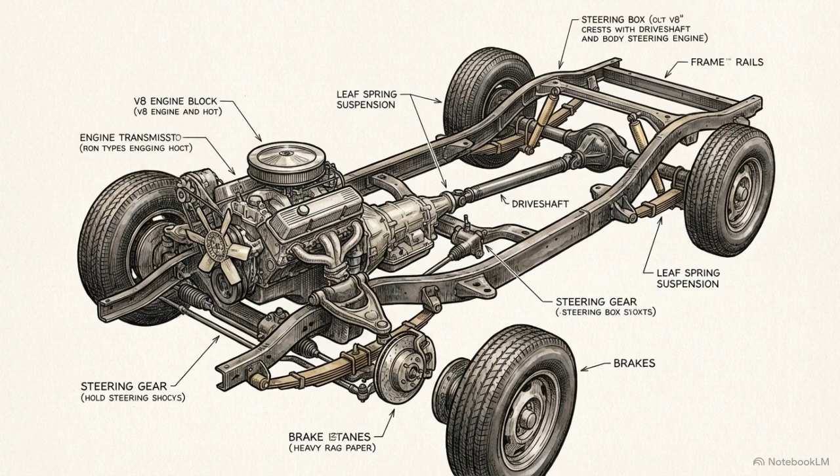Historically, automotive safety focused entirely on hardware and software integrity. If a brake line didn't burst and the control unit didn't short-circuit, the system was considered safe. This baseline is defined by the ISO 26262 standard, which governs functional safety.

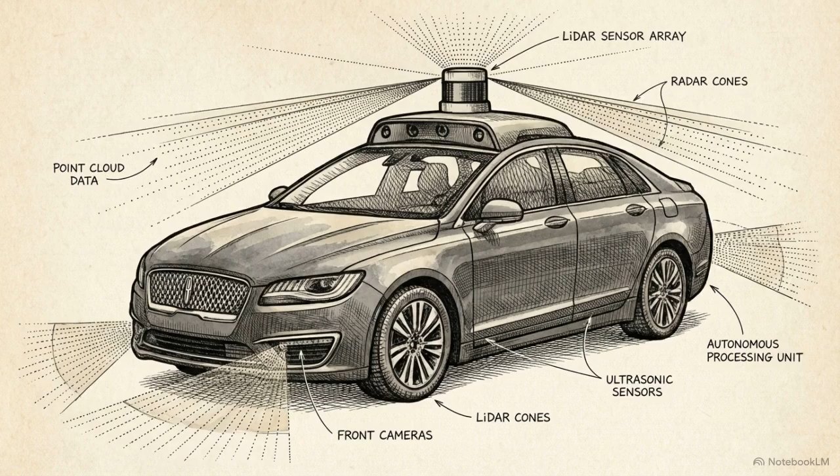Level 3 and higher autonomous systems present a distinct threat model. A software-defined vehicle can execute its programmed code perfectly, possess entirely functional hardware, and still cause a fatal collision. There is a strict divergence in engineering priorities here.

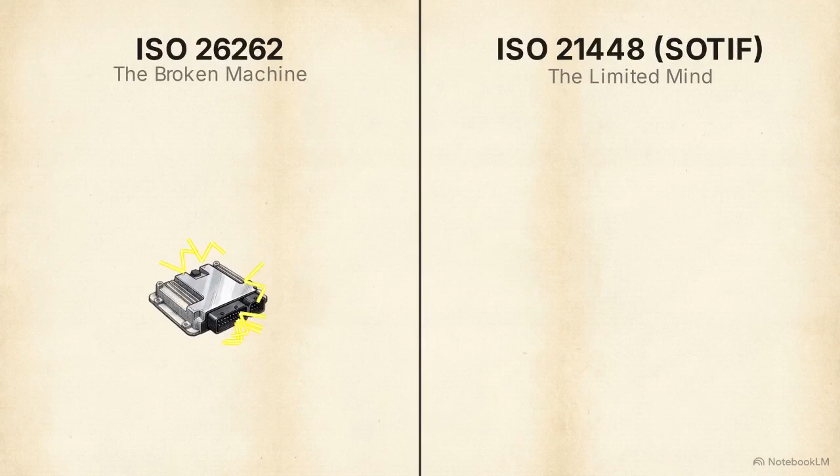On the left, ISO 26262 mitigates hardware failure, a physical breakdown of the machine. On the right, the sensor is mechanically intact but suffers from specification insufficiency. It misclassifies the white truck as a cloud because the environment exceeded its operational limits.

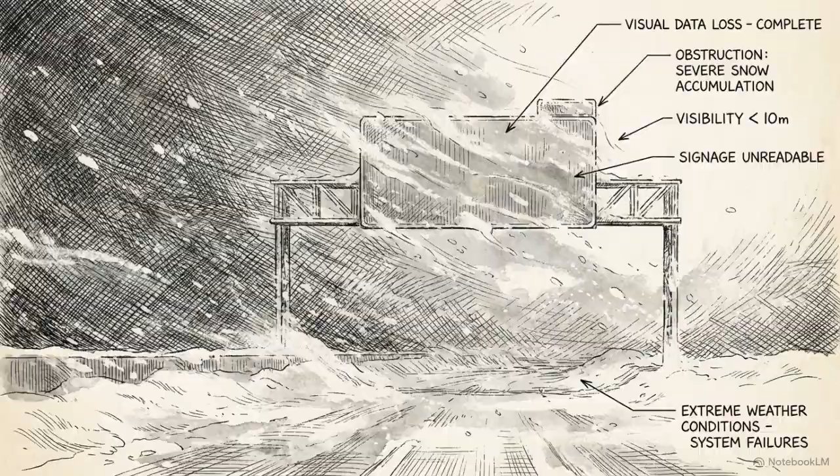To address this specific gap, the automotive industry adopted ISO 21448, commonly known as SOTIF, Safety of the Intended Functionality. SOTIF operates on a clear premise: high-level autonomy hazards do not typically stem from broken parts. They emerge from algorithmic limitations, extreme environmental conditions, and the unpredictability of human behavior.

We can track how environmental uncertainty becomes a physical accident by following data through the vehicle's standard control loop: sense, plan, act. The first block manages OEDR. Here, raw data from radar, camera, and LiDAR converge in a sensor fusion hub.

Consider an anomaly known as phantom braking. A vehicle approaches a tunnel, and the camera registers a dark shadow on the asphalt. The algorithm processes the visual contrast and misclassifies the flat shadow as a solid vertical wall.

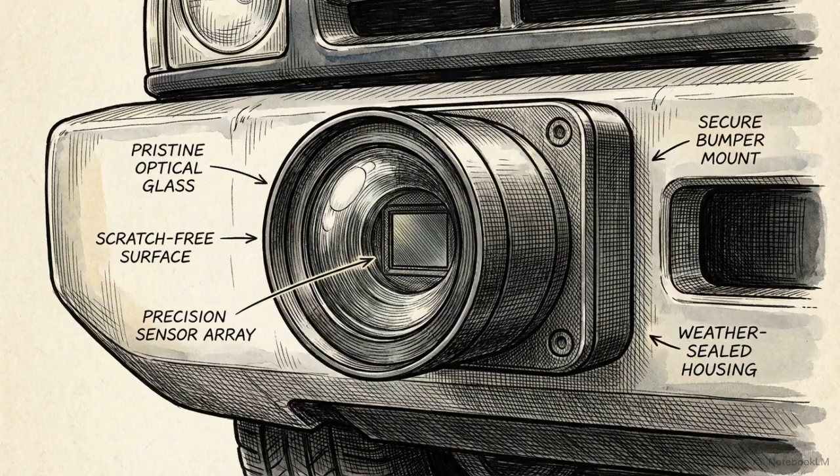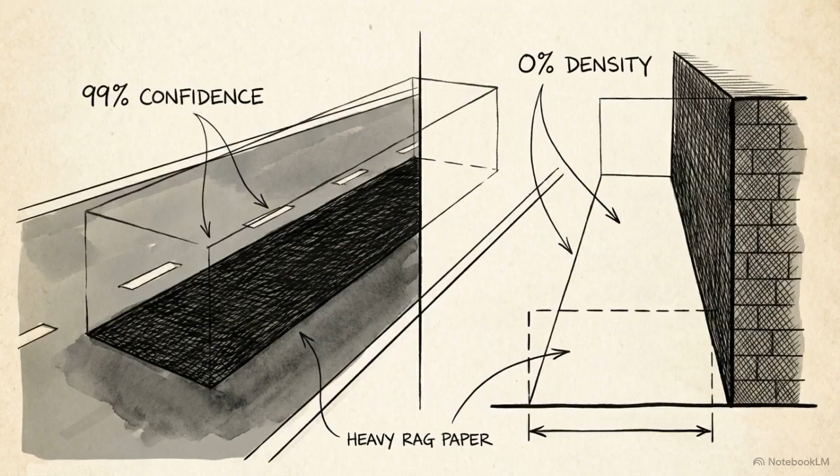No fuses blew, the lens is not cracked. The failure lies in the algorithmic confidence threshold, which prioritized the shadow's geometry over its lack of radar density. This misclassification generates corrupted environmental data. Once this data leaves the perceptive layer, the downstream logic treats the phantom wall as absolute physical truth.

A vehicle's OEDR is bound by the constraints of its sensors. Its reality is entirely dependent on its ability to filter ambiguous physics.

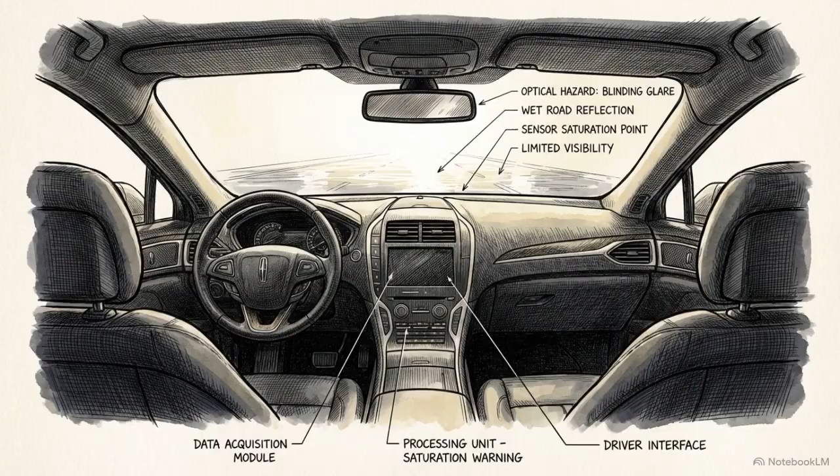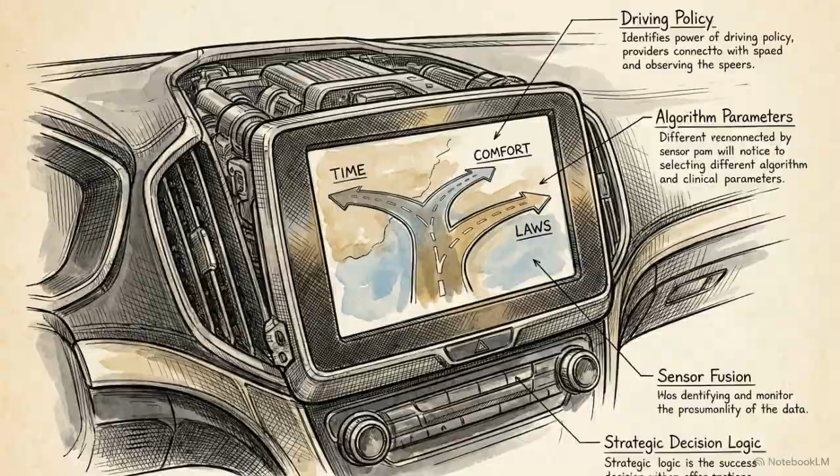The false data packet now enters the system's strategic decision maker, the plan block. This block contains the driving policy. It acts as the vehicle's strategic intelligence, continuously weighing traffic laws against safety protocols and passenger comfort. To navigate these variables, the policy relies on intended behavior, a rigid set of rules defining exactly how the vehicle must maneuver given a specific data input.

The rulebook dictates that an imminent collision with a solid wall requires maximum deceleration. The system rapidly issues a command for an emergency stop, responding accurately to the false positive. The driving policy logic executed without a single computational error.

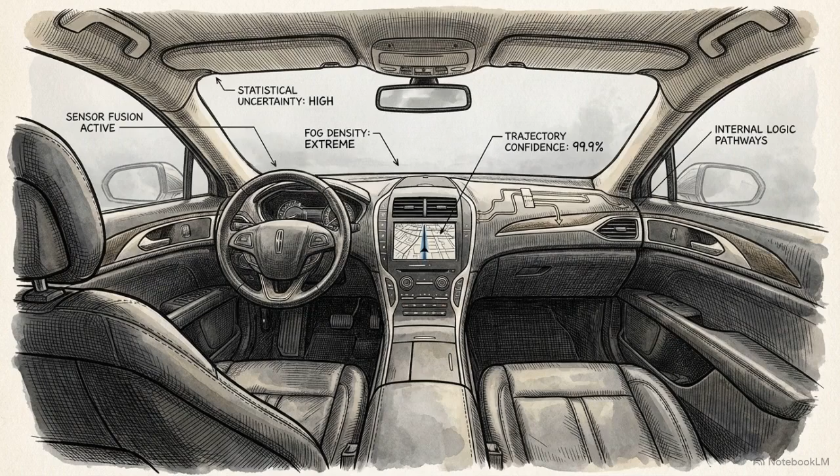A perfectly logical driving policy remains structurally dangerous if it accepts inputs blindly, lacking the architecture to weigh the statistical uncertainty of its own perception.

Preventing these logical traps requires moving beyond simple if-then rules. Real-world driving presents contradictions where following the rules ensures an accident.

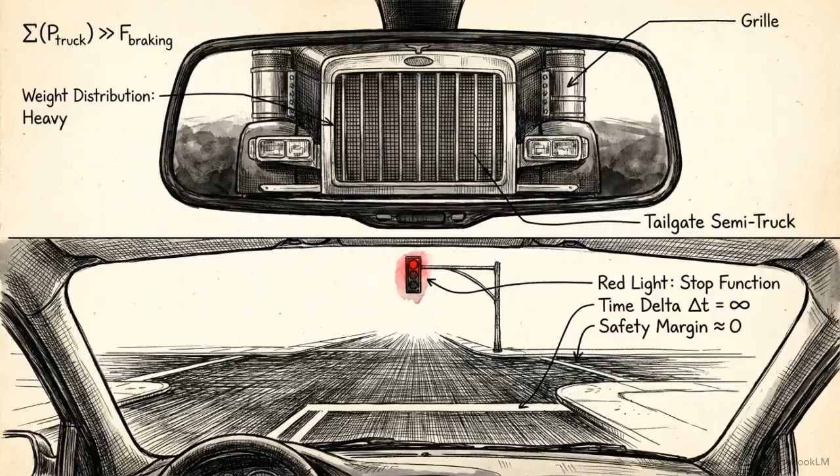The classic example is the Type 1 dilemma zone. A vehicle approaches an intersection as the light turns yellow. There is insufficient distance to stop without a heavy rear-end collision from a tailgating truck, but maintaining speed guarantees running a red light. This equation is a utility function.

Under SOTIF principles, the system relies on this mathematical calculation to resolve the ethical deadlock. The system continuously calculates the exact probability of a rear-end impact from the trailing truck versus the probability of a side impact collision if it enters the intersection early.

These probabilities are multiplied by designated weighting variables. The engineering specification deliberately assigns human injury a massive mathematical penalty, while the cost of a traffic violation is reduced to a fractional weight. The equation resolves.

The system calculates that a controlled intersection crossing carries a vastly lower risk to human safety than a guaranteed rear-end strike. It intentionally runs the red light. The architecture must possess the mathematical context to know when breaking the law is the safest possible action.

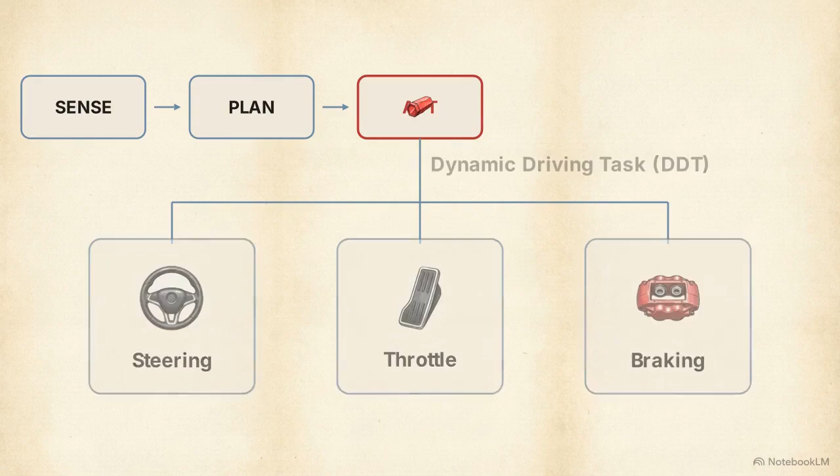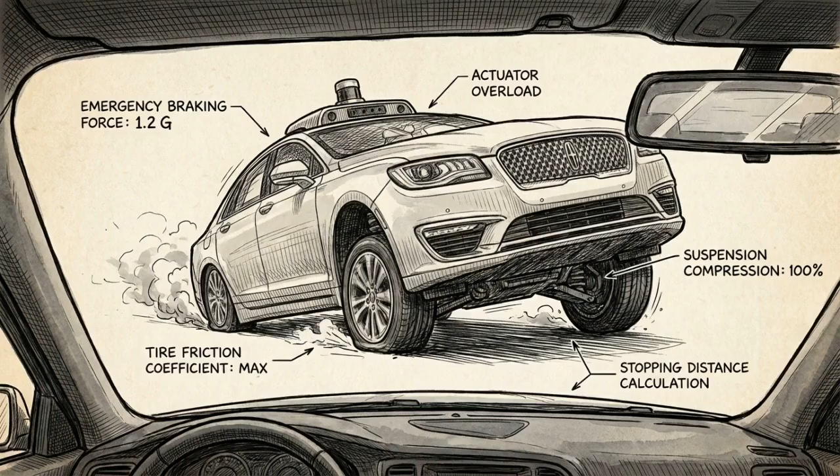That decision moves into the final block, act. This triggers the dynamic driving task, or DDT, which executes the physical steering, throttle, and braking. A vehicle operating with a thin performance margin can trigger a hazard entirely through misunderstanding context. The brake actuator functions exactly as instructed, but the sudden physical deceleration causes the accident.

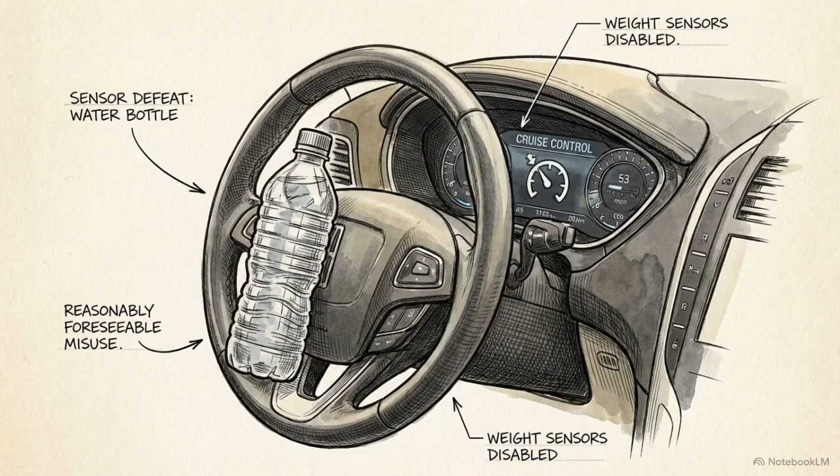Yet inside this perfectly controlled loop sits the single most volatile component in the entire system architecture, the human passenger. Consider a driver utilizing basic adaptive cruise control who assumes the vehicle is operating under full Level 3 autonomy. They look away from the road to check their phone.

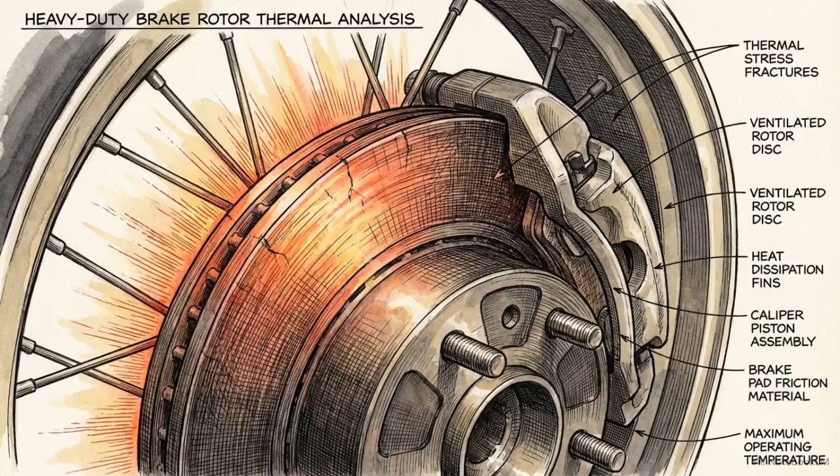Under SOTIF, this mode confusion is not dismissed as user error. It is categorized as reasonably foreseeable misuse. The engineering burden expands. It must mitigate physical limits, compensate for logical blind spots, and actively predict human negligence.

If a vehicle must account for infinite environmental anomalies and unpredictable human behaviors, mathematical certainty becomes difficult. How do engineers validate systems against scenarios they haven't thought of yet?

These are the bizarre edge cases, like a kangaroo jumping into an Australian road, that the training data never encountered. The engineering objective is systematic discovery. Engineers force the system through millions of simulated miles to expose Area 3 anomalies.

Once discovered, the anomaly becomes a known unsafe condition. The driving policy is then patched, shifting the scenario into the final quadrant, a known safe response. Validation in autonomous engineering is a continuous mathematical hunt to shrink the universe of unknown threats.

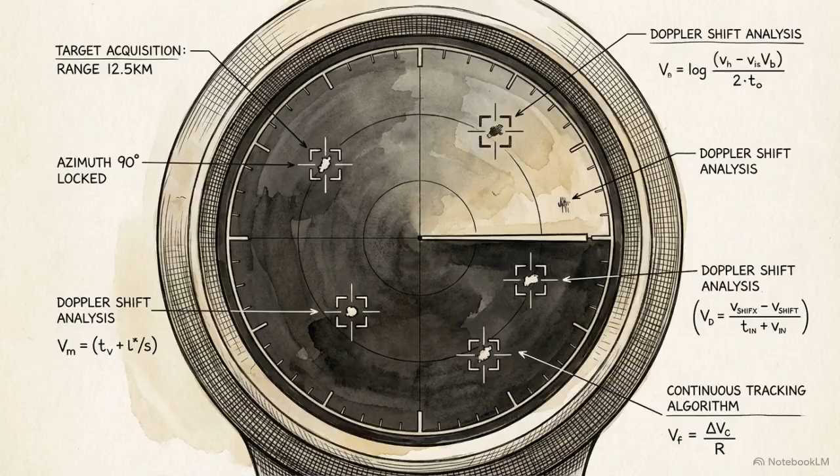This continuous cycle of discovery, analysis, and patching forms the foundation of the vehicle-level SOTIF strategy, or VLSS. It forces a hard separation between verification and validation. Verification checks if the engineers built the product exactly to the specifications. Validation proves that those specifications are actually sufficient to survive reality.

Proving that safety profile physically would require billions of accident-free testing miles. Engineers rely instead on highly accelerated virtual testing to hit probabilistic targets.

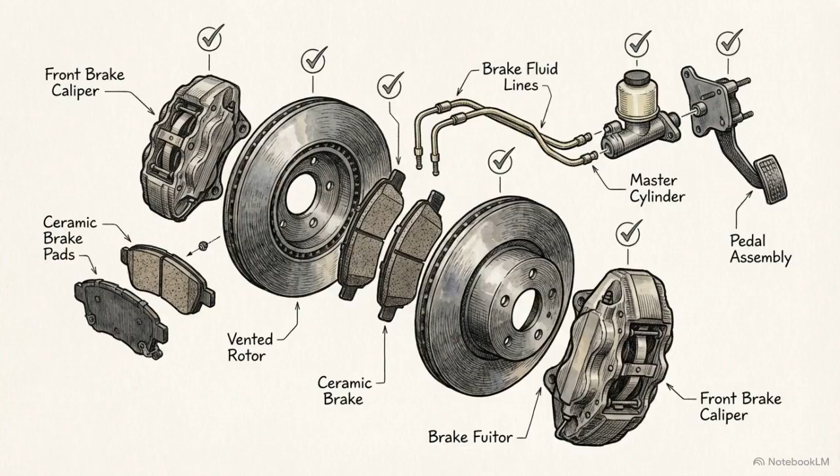ISO 26262 answers the mechanical question. It ensures the sensors, actuators, and code operate without failure. ISO 21448 provides the technical framework for an intelligence that expects incomplete data, calculates its own uncertainty, and knows how to navigate a chaotic reality.